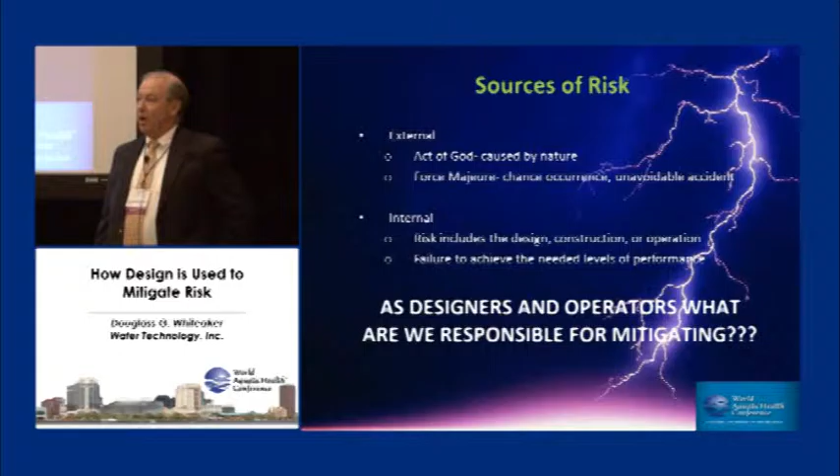So as designers and operators, what risks are we responsible for? Anybody out there want to chime in? Absolutely — at the end of the day, our clients and consumers want us to be responsible for all of those. Now, the ideal of risk management is to minimize spending, manpower, or other financial resources while minimizing the negative effects of risk.

This is done through a methodology of identifying, characterizing, and assessing the threats — looking at your facility and understanding where problems might occur — assessing the vulnerability of specific threats, and determining the risk: how likely is it to happen? Is it something that might happen in just a very odd set of circumstances, or might it happen more often than we'd like?

How many people keep track of incident occurrences and where they occur in your facility? That's a huge part of identifying where risks are going to occur, where they do occur, and how you can address them — and then listening to your clients, your users, especially what I like to call the active aging adult market, because those people are very vocal about issues. If they see tile sticking up that's cutting their feet, or slipperiness on a tile or deck, they're very happy to tell you about that.

And as a good operator, you want to make sure you go over there and take care of those things. So we're always identifying ways to reduce those risks and prioritize those risk reductions with a strategy. And that means if we see an incident report, and constantly we have a situation where we're having rescues on a set of stairs or in a lazy river, we've got to find out why and adjust that idea.

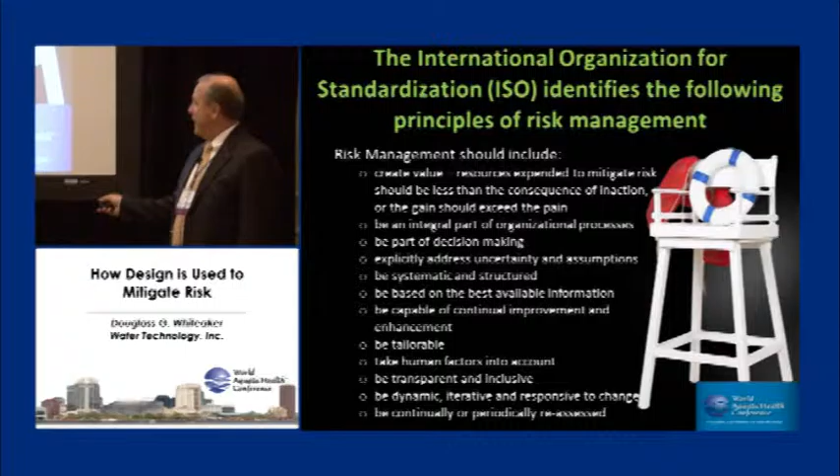And the risk management really has to be transparent, and it has to be inclusive of all the things that you're doing. And periodically, you really need to reassess what you're doing to make sure that you're covering all those risks.

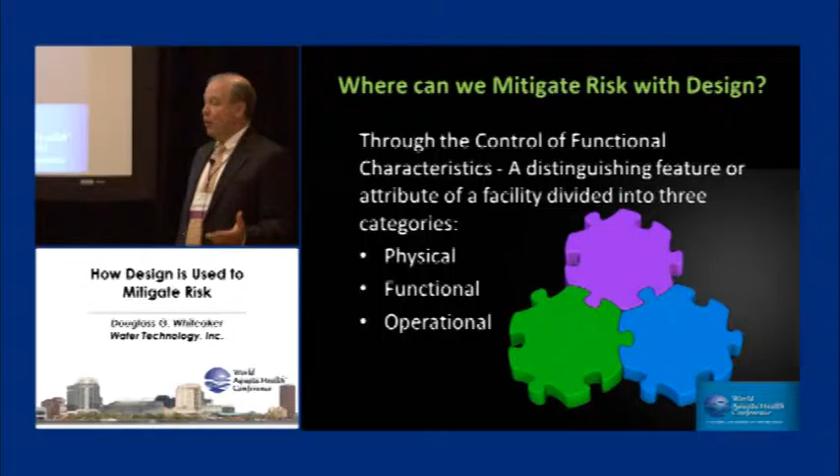And so, through the control of the functional characteristics, these are distinguished in three different categories: physical, functional, and operational. And quite frankly, at the beginning, we look at the physical characteristics, and hopefully we're mitigating the risk in the functional and operational status.

And so let's look at some of these functional characteristics. There's physical characteristics, there's surface properties, there's orientations, adjacencies, mechanical systems, and sanitations. And so this can be a really long, complex list of things to look at, and they must be.

When you start designing a new facility, you really want to look through each one of these things when it's going through the programmatic end. But when you're operating a facility, you want to be able to look at each one of these things and find out where risk occurs in each one of these categories.

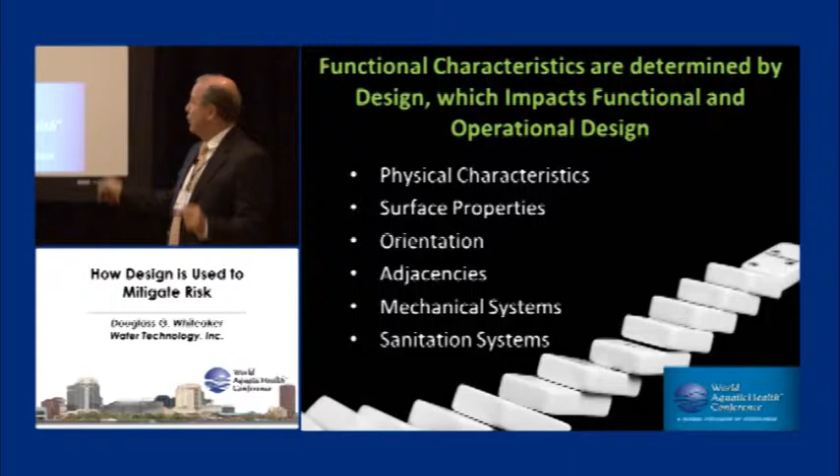And so physical characteristics, it's primary sensory. It's generally measurable because if you have physical characteristics, you have coefficients of friction, you have quantitative things you can talk about in terms of hardness, the smoothness, the shape, the color, the volume, the weights, and looking at turnover rates in terms of that nature.

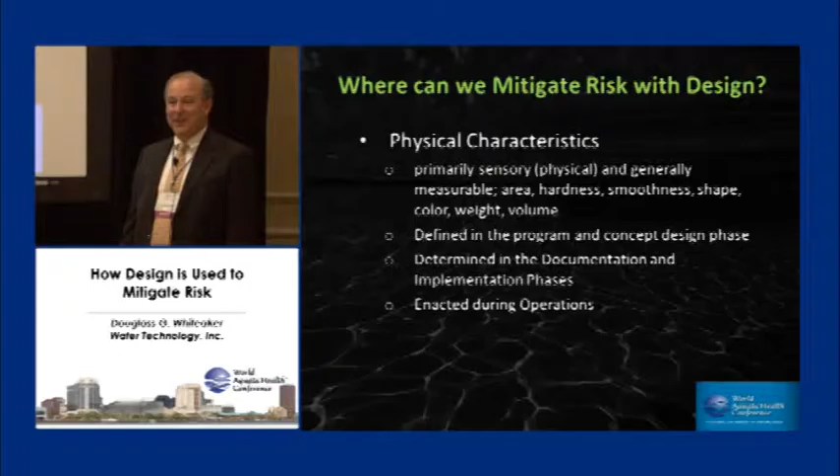You want to define. These are always defined in that programming and concept design phase. You want to, and they're finalized in that documentation and implementation phases when the facility's constructed, and then as an operator, we are faced with all those things when we're turned over the keys, and here it is for a fun and exciting place for our patrons to enjoy.

How about the transparency of the facility? Are we going to be able to see through that and look at where we're going to place guards? And we're always looking at that from a risk management perspective, where we're staffing lifeguards.

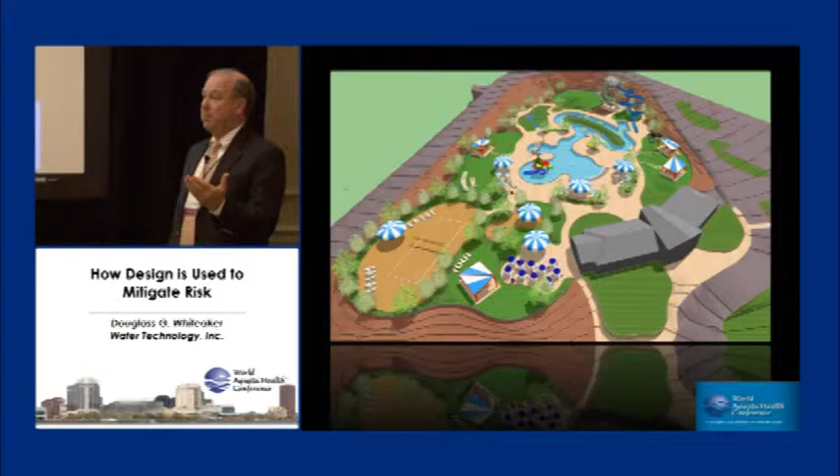And at the end of this presentation, we're going to go through some examples on plans where we can say, okay, here's a plan. Where are some of the challenges? So here's some images.

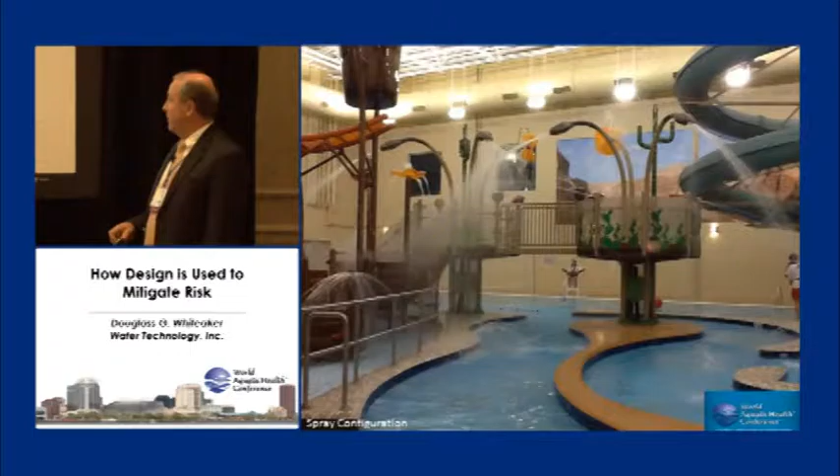This shows a play structure and some guards staffing it, and the sprays coming into the lazy river. One of the things we have to be cognizant of is where these sprays are overlapping and where they might cause blind spots in our water, because we're not going to stop having fun and sprays in our facilities. What we have to do is think about this from a staffing perspective so we can see where people might run into problems and not be seen when they are having problems.

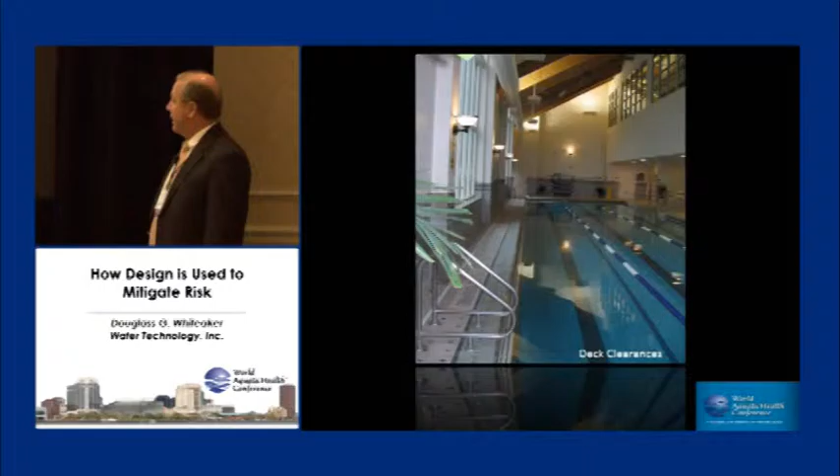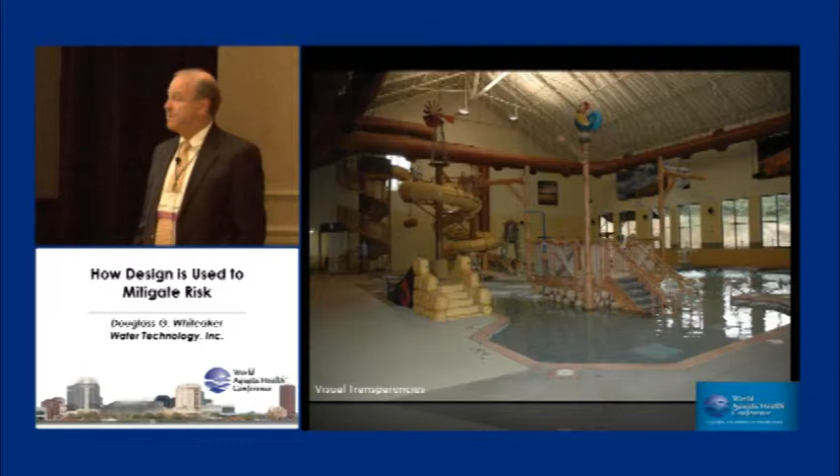Visual transparencies. You can see with this pool there's a lot of barriers. So if there are 2 people in the pool, you'd have to have 2 lifeguards, just because there's too much obstructed view corridor to be able to see where problems might occur.

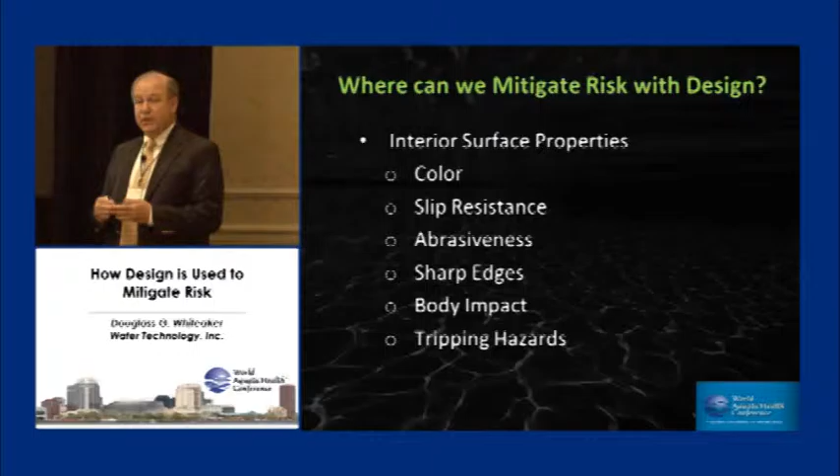Some of the interior surface properties are based on color, slip resistance, abrasiveness, sharp edges we try to avoid, body impact, and tripping hazards. This is a deck design, a ceramic tile deck. It actually does include a slip resistant tile. Typically, we see a 1x1 or 2x2 ceramic tile provide a good coefficient of friction.

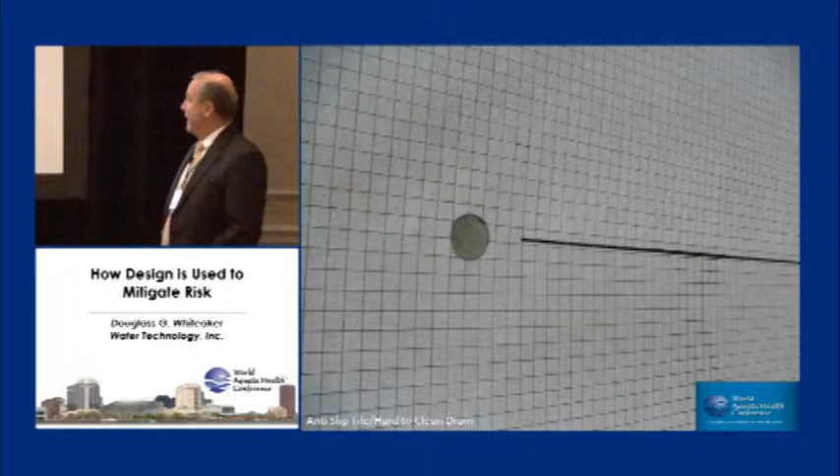But one challenge is that a lot of owners decide they really want nice-looking deck drains, these little slot drains that look really nice. But how do you clean that? Trying to clean out Band-Aids and hairballs and everything else that goes down there is very difficult. So looking at that early in design, and going for functionality rather than aesthetics, is really important.

This shows a non-slip deck with broom-finished concrete, and a deck drain that does have the capability of being cleaned. You can lift that up and clean it out, much easier to operate.

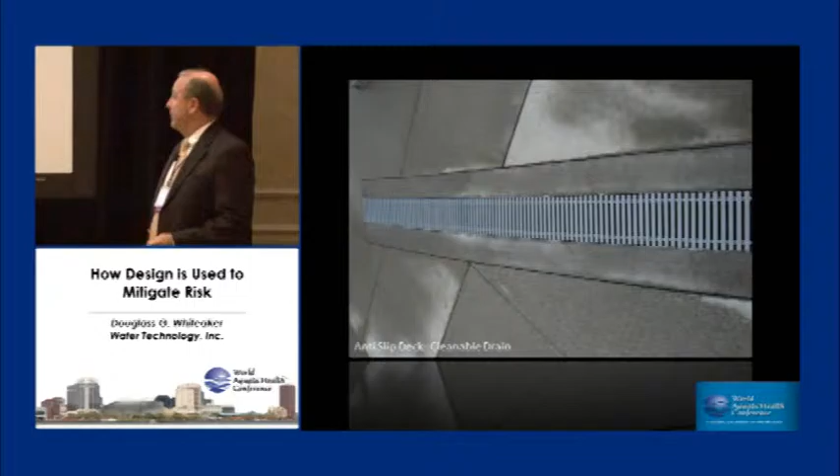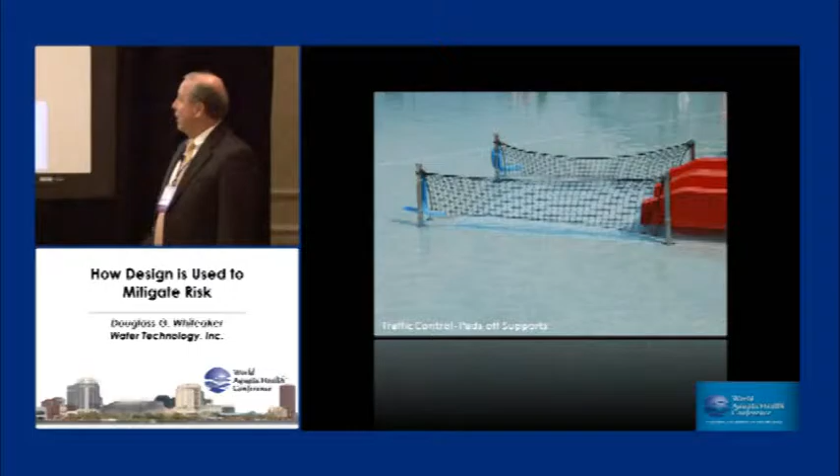Again, having good traffic control, having safety landing zones with soft pads from these slides. One thing we see here, from a maintenance or even design perspective, is that some of the bumpers initially installed on that are now fraying. From a walk around the facility, we want to make sure all those things are maintained.

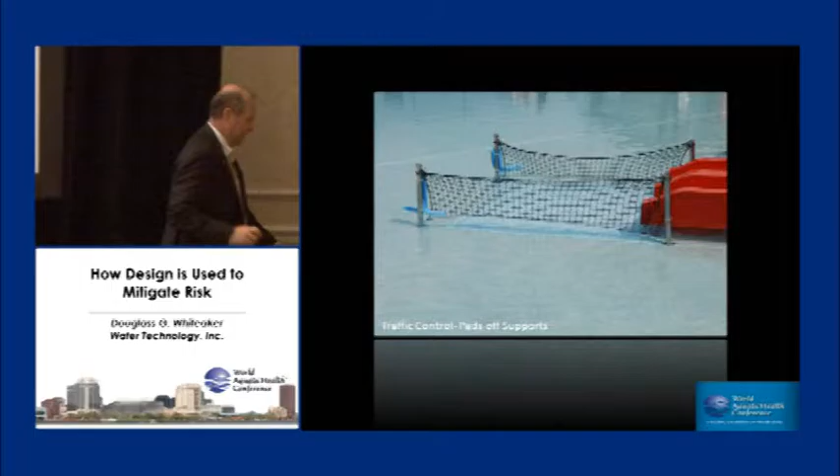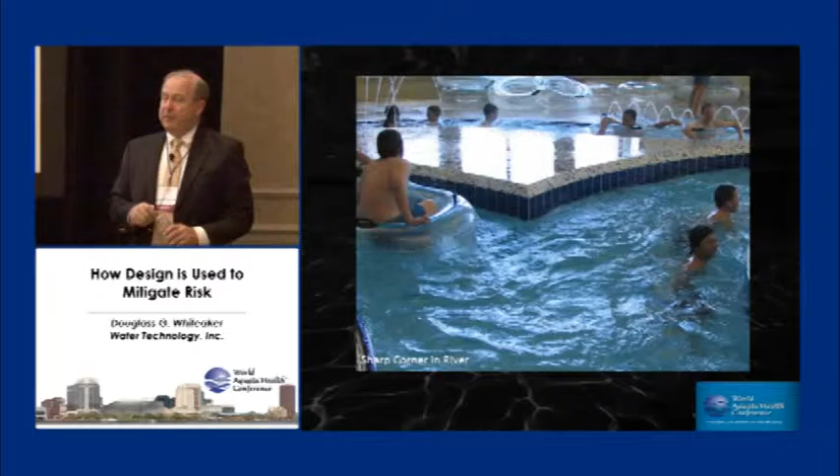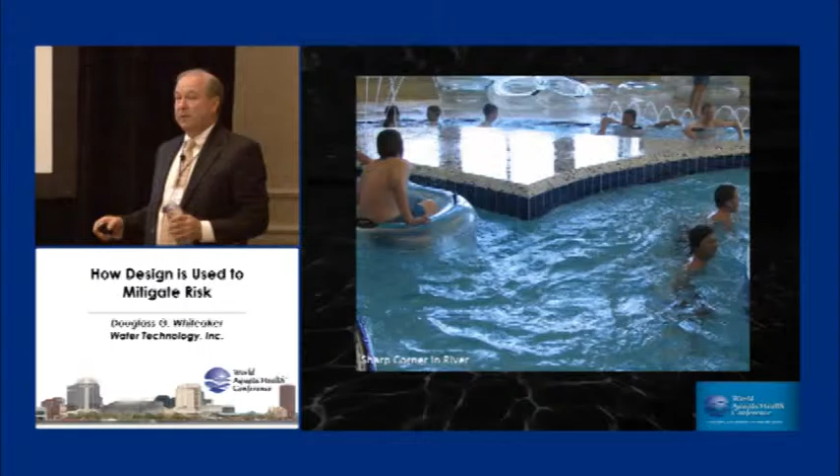Here's an interesting issue on the lazy river. The current is flowing this way and this way, and we have a sharp point right there. These are things we want to look at in the design or operations, so that people floating around underneath the water, propelled by the current, don't run their heads into that sharp corner.

Again, this particular facility is actually in... is anybody from the peninsula, or Puget Sound Peninsula? I mean, this is the Seattle area.

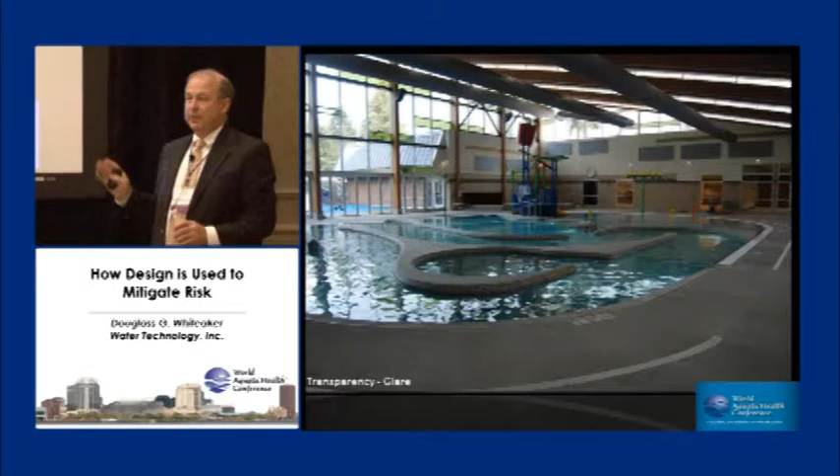They don't have too many sunny days up there, but this picture was taken on a sunny day, and you can see, even though we have great transparency in this facility with all the glazing and fenestration, there's glare. So it'd be difficult to guard this in some areas. You'd have to have more guards in there.

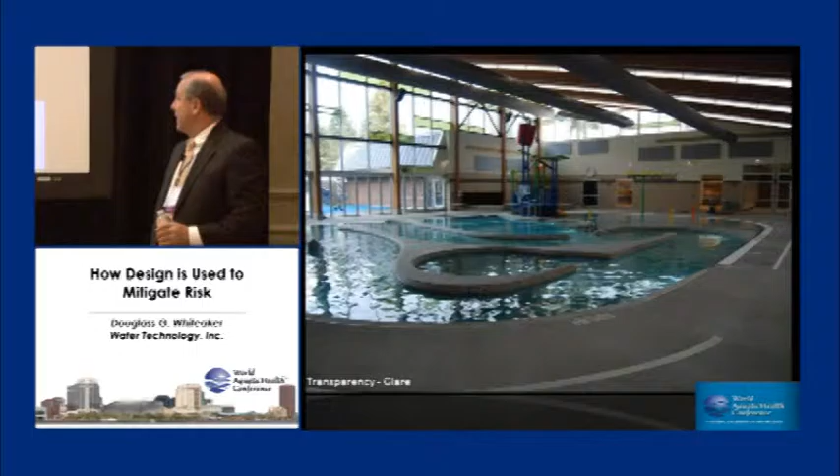But this does illustrate a nice deck drain that's a non-slip deck, easy to maintain, and provides a nice functional deck. This is one of the run-out slides popular in family aquatic centers.

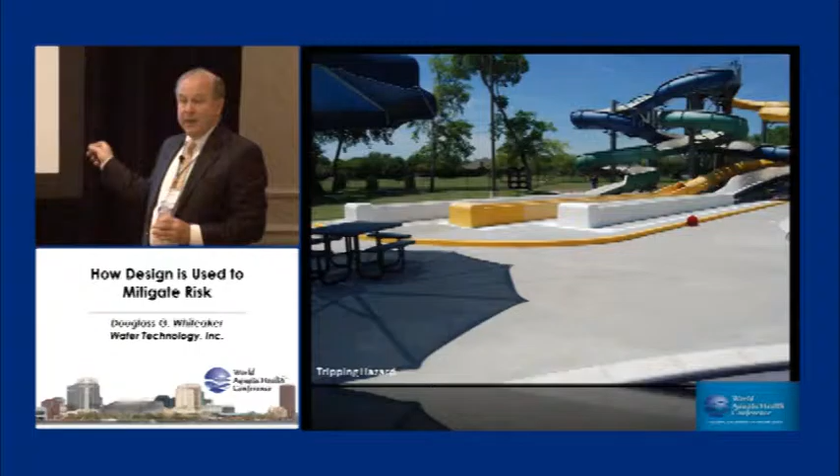There's a mechanical challenge to getting these slides to be on the same level as the pool deck. This is one solution, but I don't particularly think it's a good design solution to raise that up and have a step coming out of the slide. As patrons come off the slide they're excited and might not see that, or if they're coming over to see their friends, they might not see it and trip on it. So it's a challenge.

Here's a design where the water sprays were placed along the deck side, and so these enterprising young men decided they would make a water feature in the deck. Placing these things on common walls, where they can sit on them and spray all over the deck, creates a water hazard that could be a slip issue, and also wastes a lot of water.

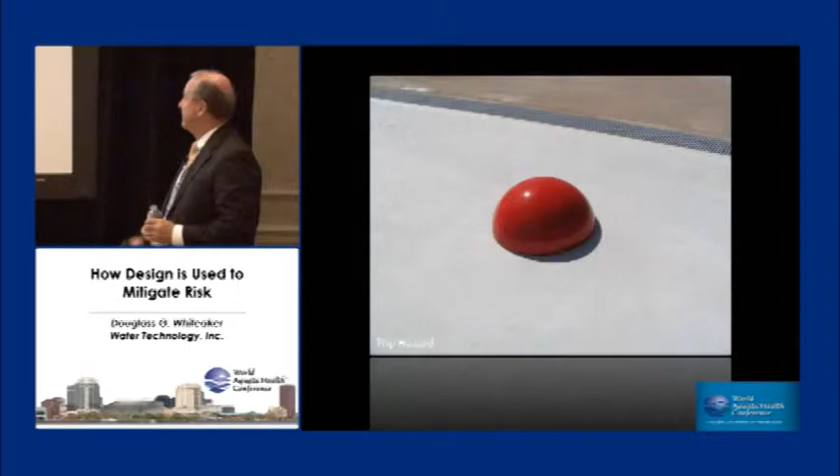Again, I see pools that put these big things, sometimes not so big items, in the floor of the pool. Even though it's a brightly colored object, kids sometimes aren't paying attention, and they could be tripping over these types of things. Now here's a good example of...

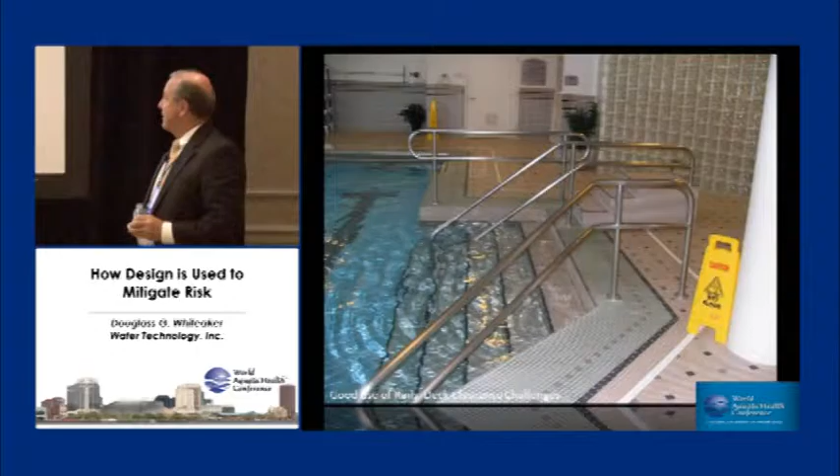This is from the past, where it's a pretty good use of the rails for easy entry of users of all different heights and abilities. But the problem is, look at the closeness of this rail to the column there. It's too close. So from an accessible type of a feature, it becomes a challenge.

Again, this shows a very challenging way to try to enter onto that transfer tier, unless you're over here, which doesn't meet the ADA requirements for distance.

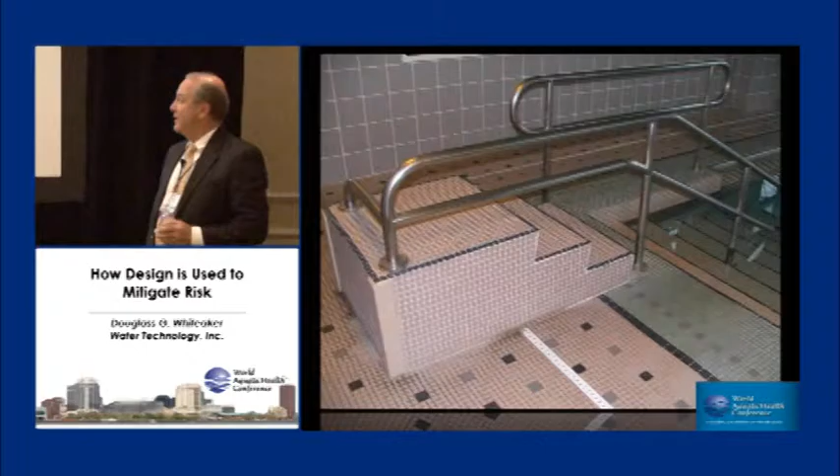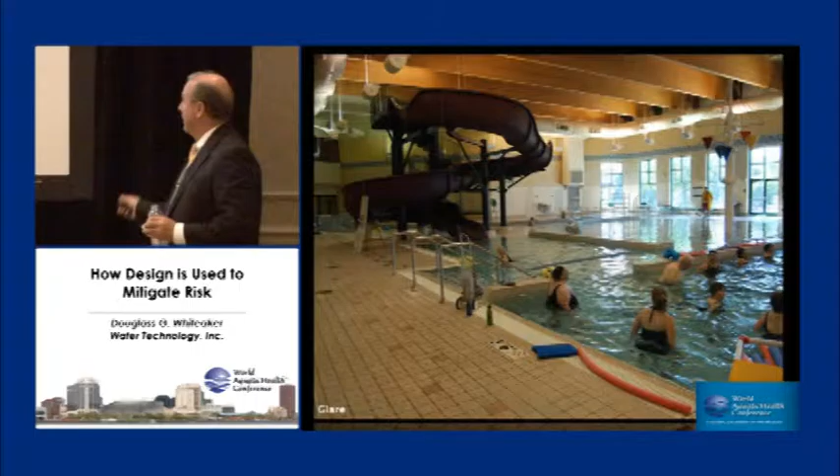This is a good example of a facility that has relatively good transparency from this perspective, but the glare on the water becomes very difficult for a lifeguard to be able to see what's going on in other places. Orientation, whether it's a solar orientation, the lighting levels within the facility, or the water depth placement, those are all important aspects to optimize that transparency.

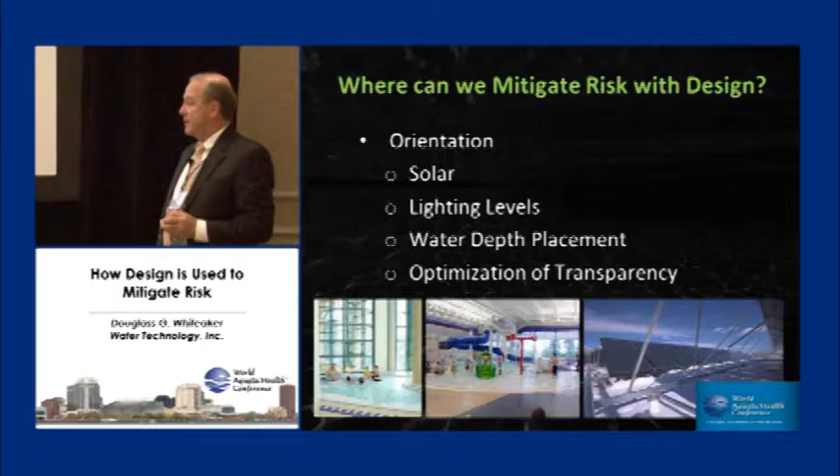This is a facility I visited a couple weeks ago. This is during the day. During the day, that facility had 5-foot candles of lighting on the deck. And at nighttime it's even worse.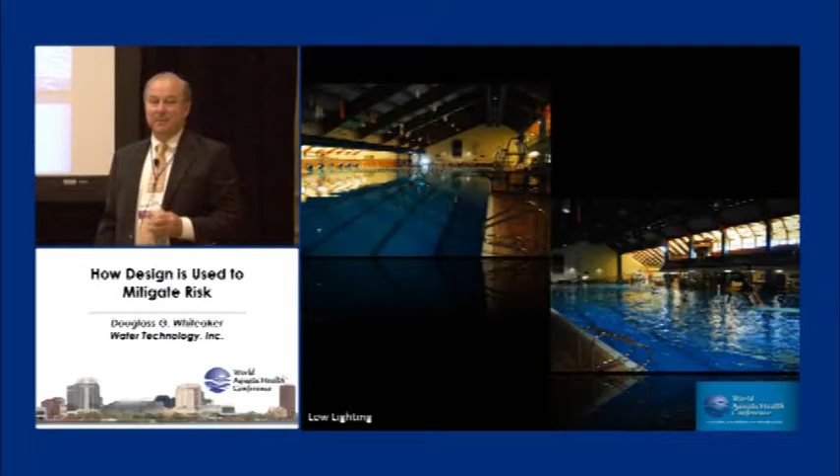The reason for that is because in the original design, they put these lights way up on the ceiling, surrounded by ductwork. There was no way to get to them. They hadn't changed the lights in 20 years, which was really interesting. They were talking about having mountaineering guys come in and rappel to change the lights. I said, well, what you need to do is change light positions so you can actually change lights.

One way that we're seeing that helps balance the light is actually to provide clerestories or clear walls, so you can bring natural light in all over the facility so you don't have glare. It's a diffuse light. This is a good example of how that can occur and have natural light that doesn't create glare.

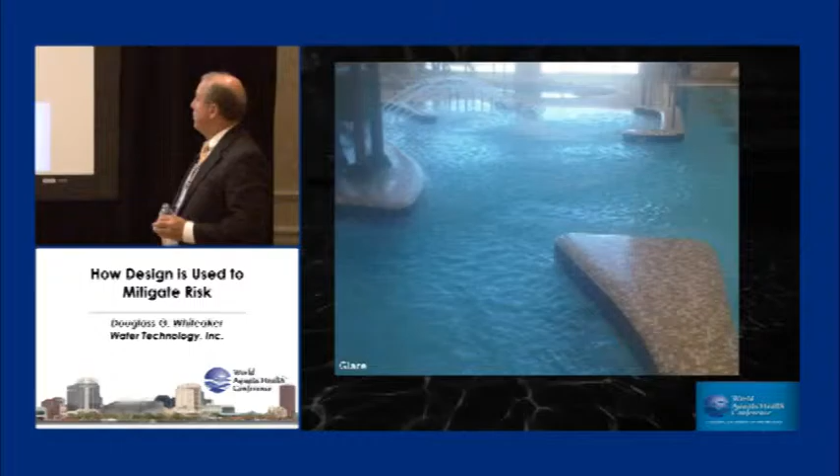Again, glare across the pool is very important. Here's a good image of a nice pool, a wave pool. Obviously, there's nobody in it this particular day, it was raining, but it does show having lots of play facilities. There's great transparency, even though it's a wave pool. It can be guarded with minimal staff, but when this pool's busy, you don't have to worry about people not being able to see all around the pool.

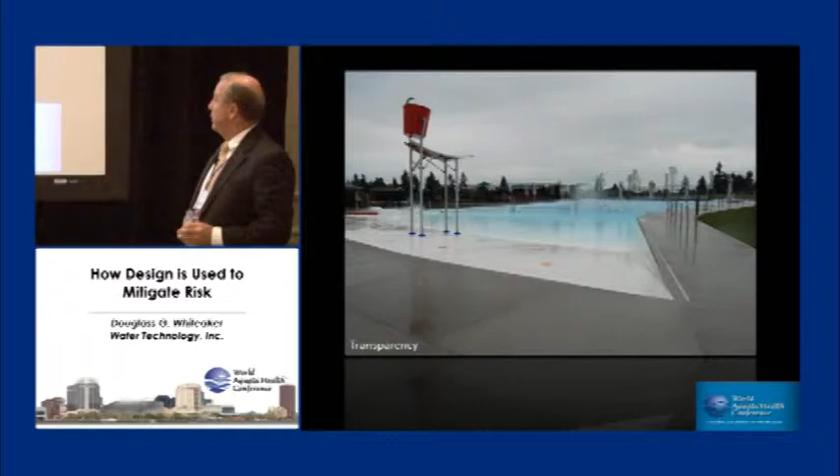Here's a particular pool that we're seeing a lot more of, the splash pads. The splash pads oftentimes are one of those anomalies - do we need to guard a pool that's only 6 inches of water depth? Well, I think we do, and it's really important. One of the things all of us in the aquatic design industry are doing is challenging the manufacturers to make it more transparent, because if there were 2 kids in this pool, you'd need 2 guards to be able to see it. And when you start to get 150 kids in this splash pad, you need to have even more.

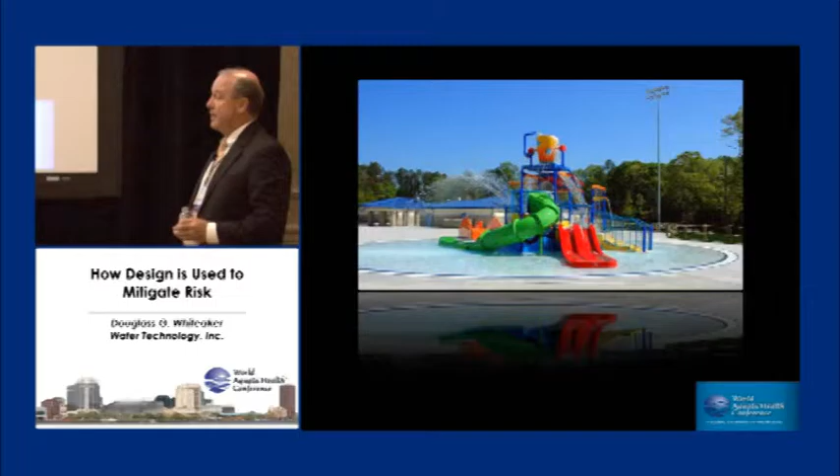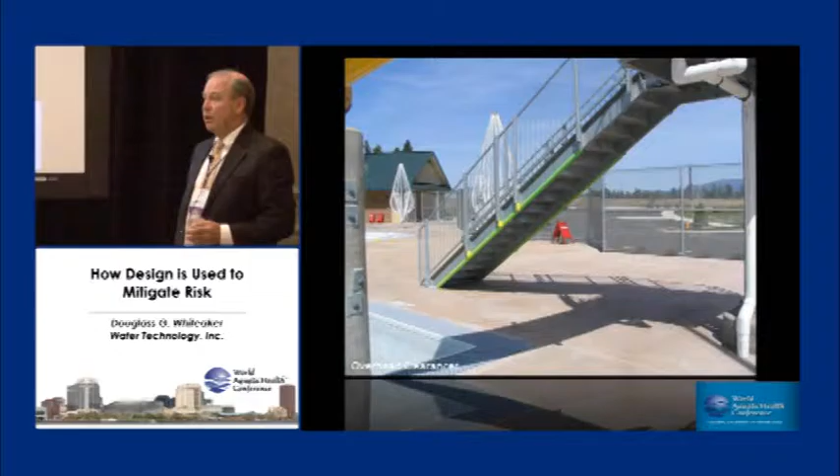Overhead clearances, how these are designed—there should be a fence around this so people can't bump their head. You can see the operators have been kind of creative, taking noodles, slicing them in half, and putting them on the stair rail. But again, that doesn't prevent somebody from banging their head into it. So it's really important to look for that in the design of these facilities.

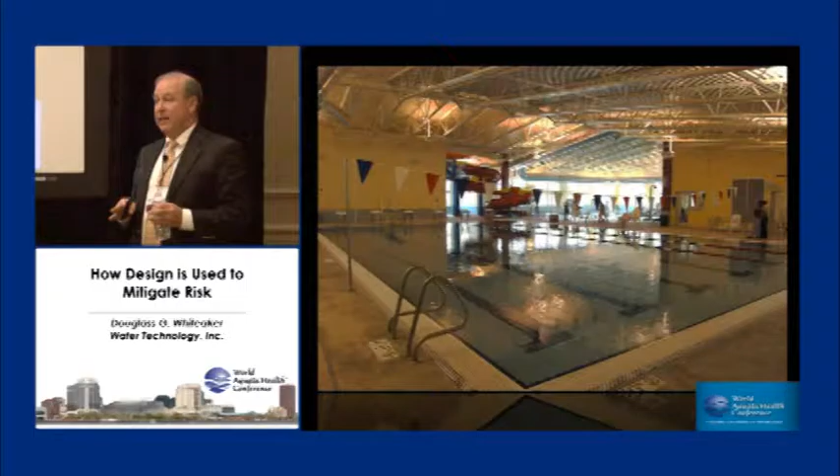This is a good example of what happens when you don't have sufficient interior light and you have a lot of exterior light. You get dim light levels over here, and then it creates that glare. So it's important, if you're going to use natural light in a facility, to bring it in as diffuse light and bring it in as deep into the facility as possible so you have even light levels around there.

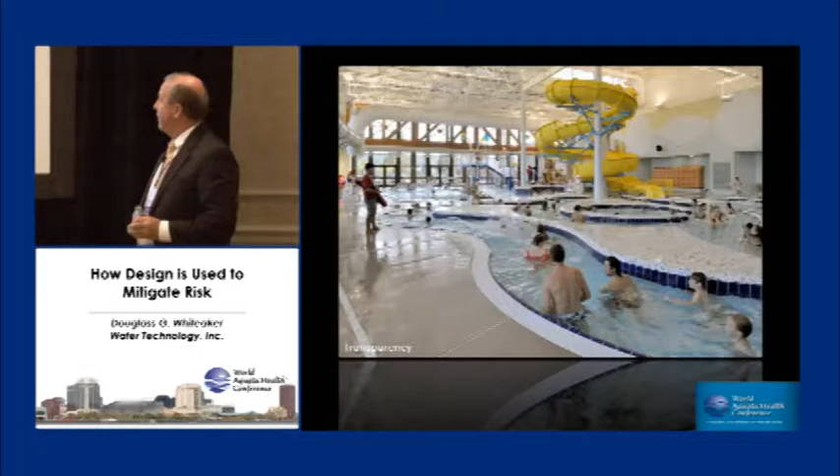This is an example of a facility. This particular one has those deck sprays, which really should be over here so they're not causing possible water loss. But this illustrates a pretty good transparency, so you can see through there. That's by design, and that's one of the things we're seeing. Even the play structure—you can see underneath it—so you have that great transparency. The adjacencies are another good place where we mitigate risk.

Where are different components, like lazy rivers? Where's the shallow end? Where's the entrance to the locker rooms placed? Where are the lifeguards' positions? And where are the amenities? So that we can design a facility that has good entertainment value, or watertainment, but also is easy to guard and maintains its programmability. This one shows some of the challenges here.

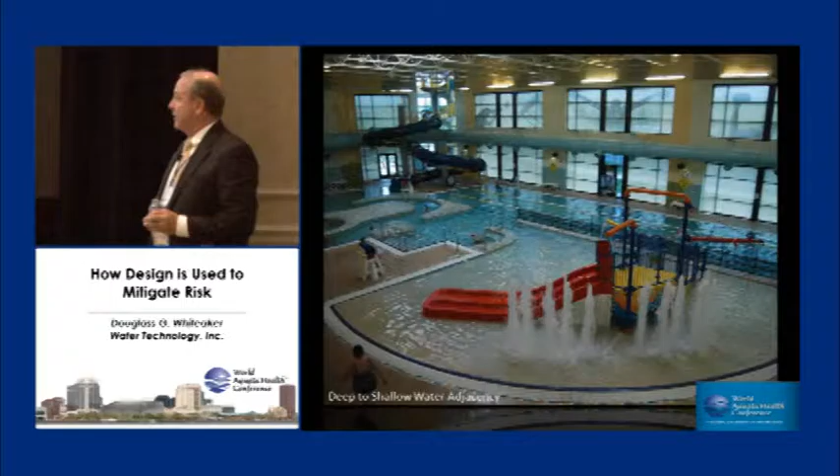It does have good transparency, except for right here in this play structure. But one of the challenges here is that they had a guardrail here, but this is 10 feet deep water, and this is zero depth entry. So guess what? That adjacency of shallow water to really deep water created a lot of risk and hazards by people coming, little kids getting into that area and causing risk to happen.

This shows a very transparent facility. Again, this is zero depth water right next to a lazy river. So instead of putting a screen there, they positioned a guard to make sure that this challenge of having moving water right next to this zero depth water didn't create an issue.

The other thing this pool does have, over in this room, is their competitive pool. So they actually separated their competition pool from their leisure water. And they have a common entrance over on this side, so you can either go to the competition pool or go to the leisure pool, which works out very nicely—so you can have swimming meets while you're still maintaining your leisure and warm water activities.

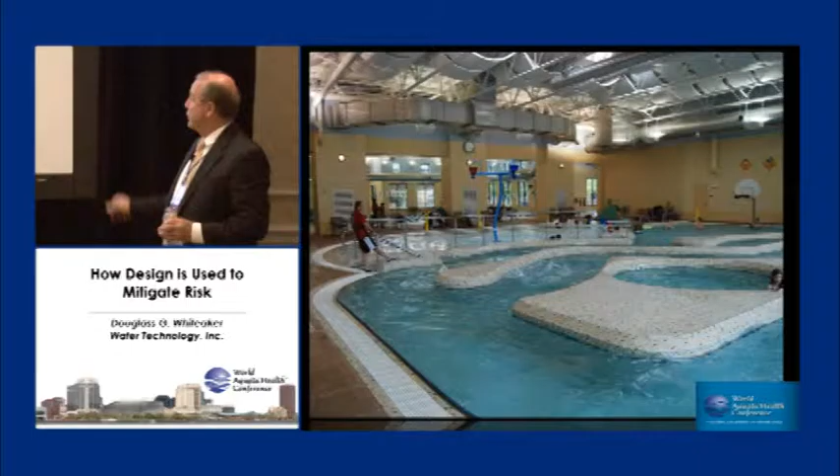This is another common occurrence that we see, where people come in—this is a 1-by-1 tile. It was well maintained in the fact that the night staff came in and every night buffed that tile, and they did a really good job of keeping it clean. But what they did is made it really slippery. So it's important to use the proper cleaning chemicals so you don't shine the tile and you keep its coefficient of friction.

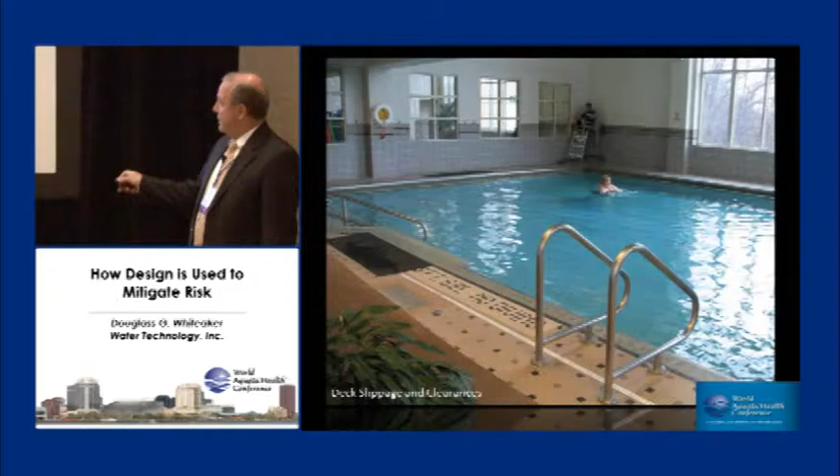And this is what people have had to do—put different types of mats down so people don't slip. And again, you can see this is a wall here. There's a nice plant, and this distance between the ladder and the wall is very close.

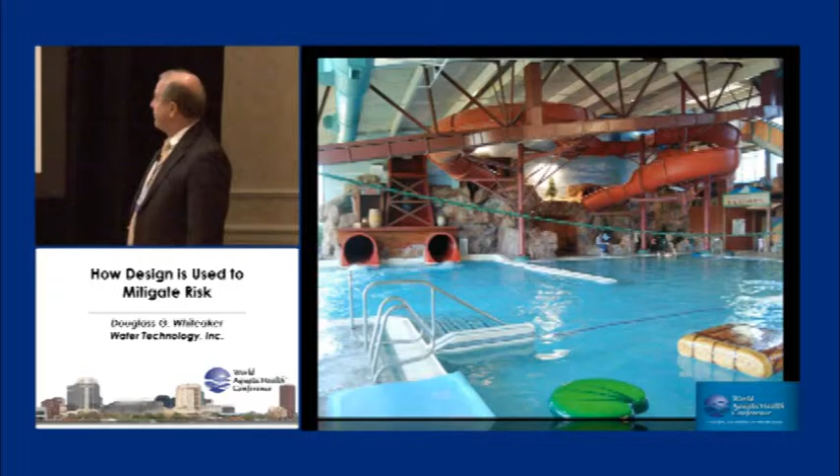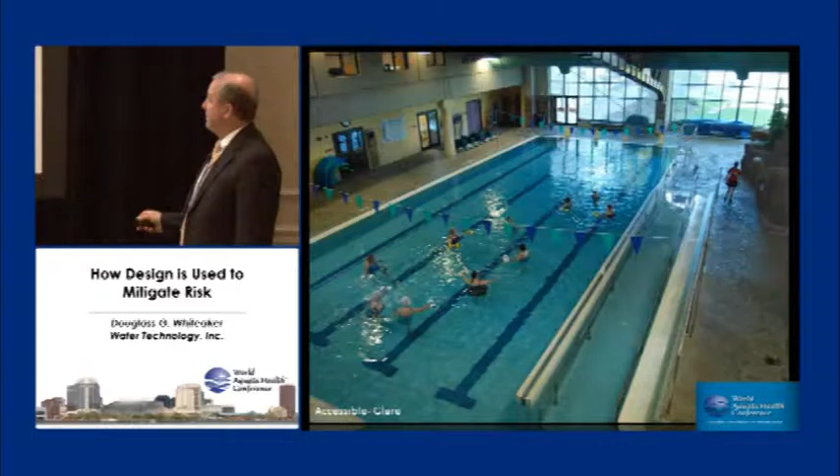This is a facility that has a really nice ramp that offers accessibility to the pool. It's very heavily used by a lot of different programs, including lap swimming. But again, look at the glare that's occurring because of the exterior windows.

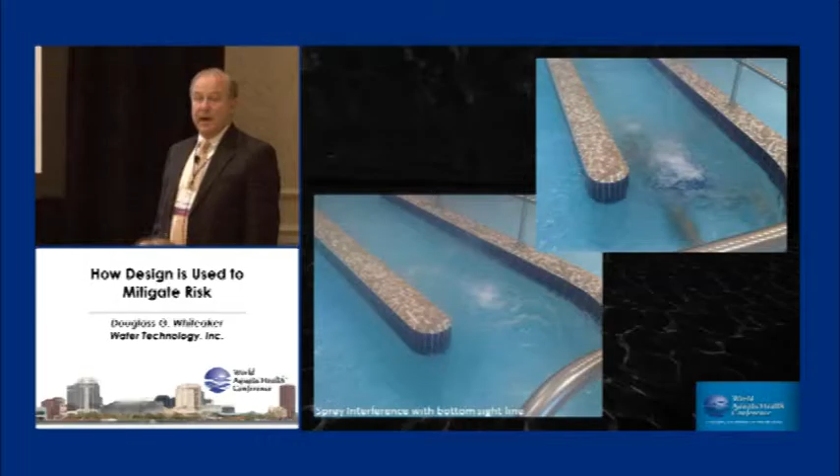This is a great example of spray interference. This was prior to putting in a rescue profile. Now you can see that rescue profile, and you have to really look for that to see it underneath the water there, and that's only 18 inches of water. Here it is in a lazy river where you can't see that rescue profile underneath the water. So it's really important—we were taking a picture of that—to consider how sprays are going to combine so that you can make sure you can see through those on the design.

Mechanical systems are another place where, through design, we always look at turnover rates. Sometimes our state health codes are just minimums. We have to remember that the guidelines are the minimums. If we're going to do a pool that's going to be more heavily loaded, have a lot more people come to it, we've got to exceed those and have faster turnover rates, because some of these health codes were authored in the 70s when we didn't have leisure pools and spray pads like we're doing nowadays. So in design, we've got to look at that.

We've got to look at turnover rates, the type of filtration, how we're collecting and distributing the different water, and then make sure it's easy to operate, because a lot of times it's tough to get great help these days to maintain them. So we want to make sure we're designing for the level of our staff. Otherwise, if we get it too complicated, there's not too many mechanical engineers operating these swimming pools.

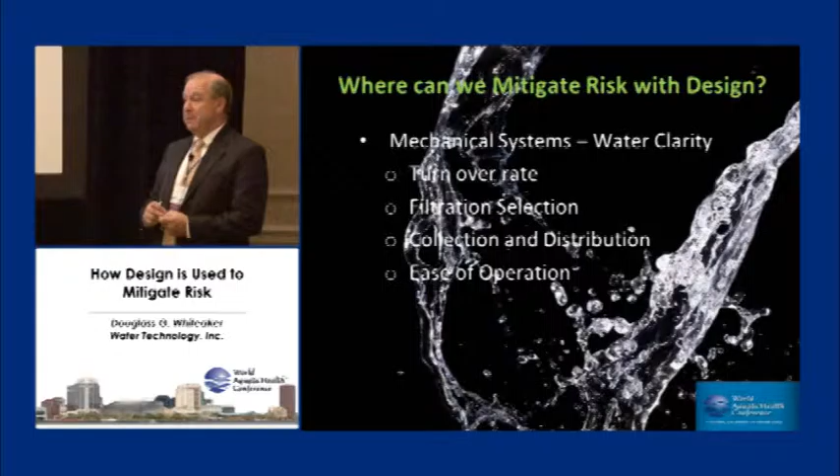Some of the trends we're seeing in the industry to help provide crystal clear water that's easy to maintain and cost effective is using regenerative media filters. Regenerative media filters operate to a lower micron size. We're seeing the popularity of medium pressure UV systems going in on every body of water, especially in these indoor leisure pools, and also on the booster pumps that atomize the water to take the chloramines and byproducts of disinfection out of those facilities.

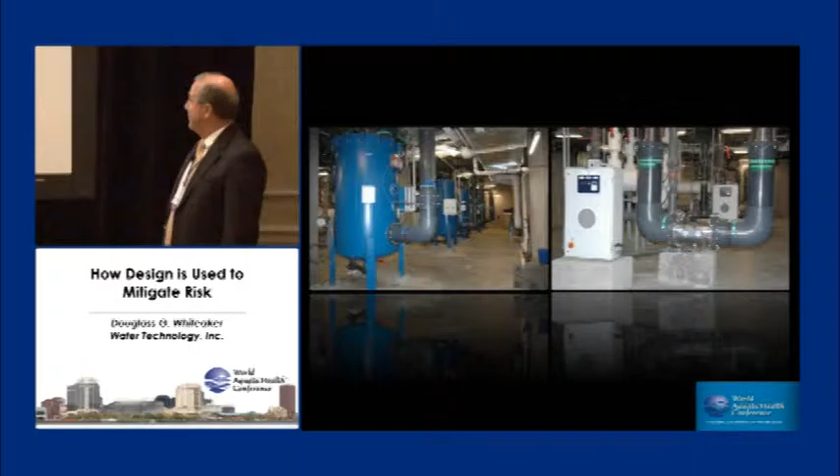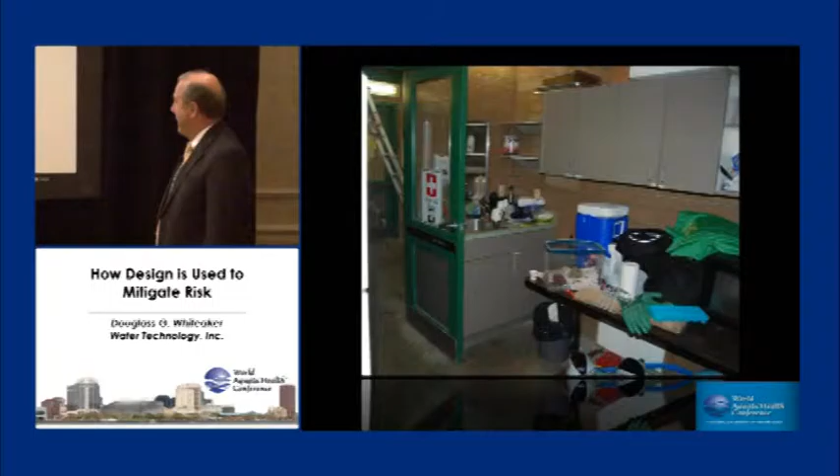This is some examples of what not to do. This is the lifeguard safety room. You can imagine what would happen if there was a rescue that had to take place in this particular facility. I don't know how you'd get to the cot.

Again, this is a different facility. This is the pool manager's office. I don't know how they would operate. If I was a consumer and I walked into this facility, I would turn and walk out the door if I saw this, because what kind of level of competency does this tell you is happening here?

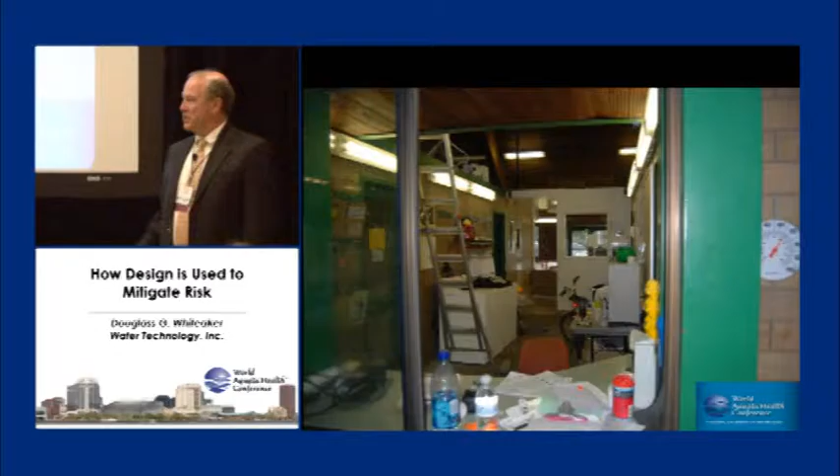And this is the look from the entrance through the facility. This was even a funnier thing - they had an HVAC unit on top, and open guard rooms, and they're constantly sending up guards to flip the switch on the HVAC unit, and they had open locker rooms right next to it. I don't know if I'd want to change in that room.

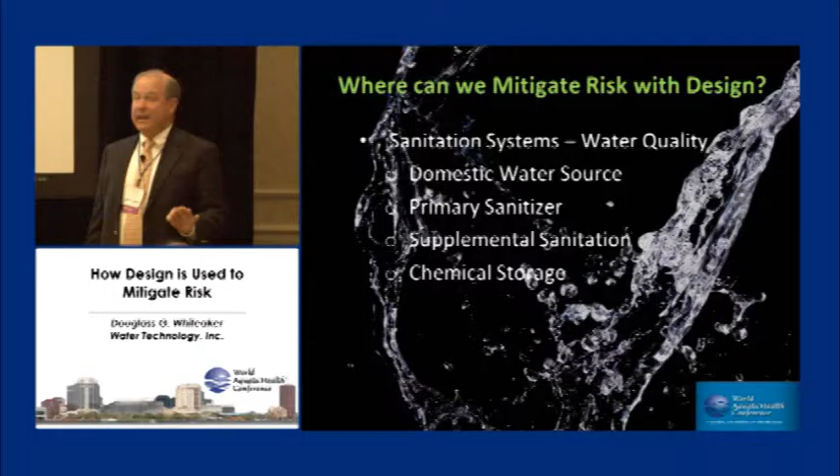So you see a lot, but through design we want to take care of a lot of these issues. Here's some of the things we see in chemical storage rooms - things that have been stored there for such a long time, they don't even know what it is anymore. Broken bags, just a complete biohazard waiting to happen.

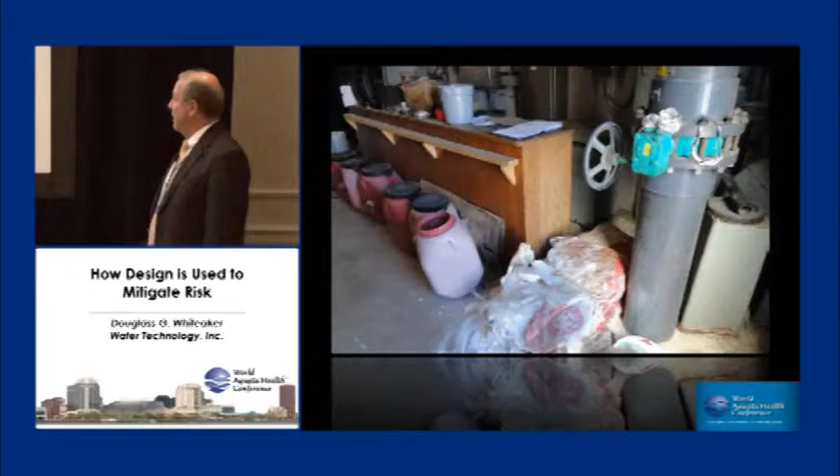Here's chemicals that have been stored in a facility - we've got acid, chlorine, hydrogen peroxide. A whole bunch of different things in the same chemical storage room that wasn't ventilated. Again, this is a potpourri of things that shouldn't be all in the same place at the same time. So it's really important to look at all these designs.

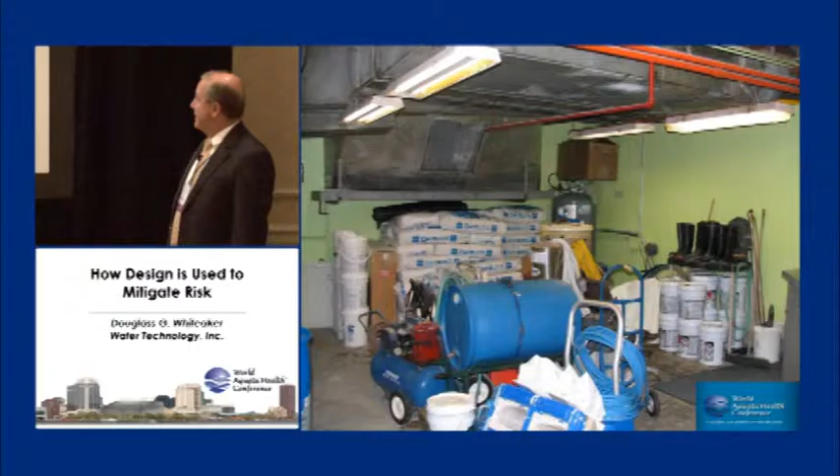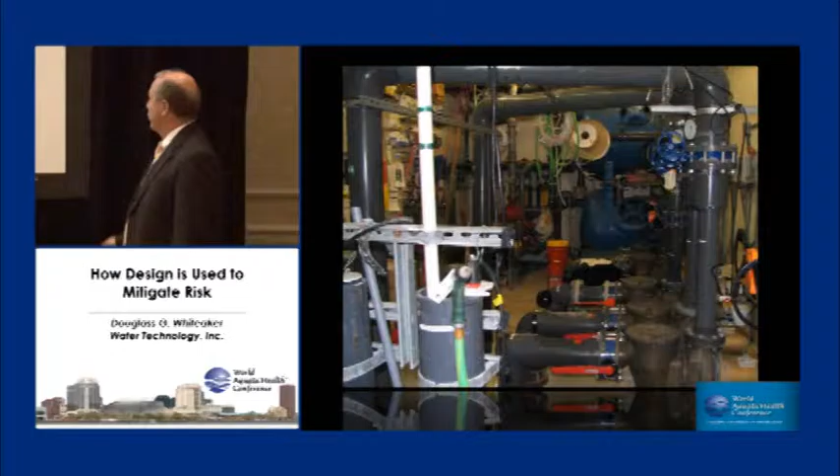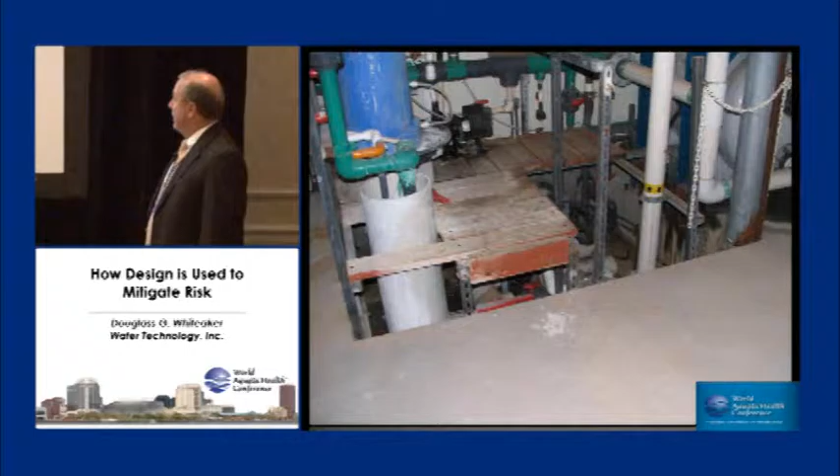Mechanical rooms, by design, shouldn't be mechanical closets. We should have accessibility to be able to change out pump motors, move valves, and get through here - not become storage rooms for other things. You should not have to be a contortionist to change a pump motor, or even to look at the pump strainer basket to see if it needs to be changed. If you design a situation where you don't provide good access, today's operator is not going to look at it until there's an issue.

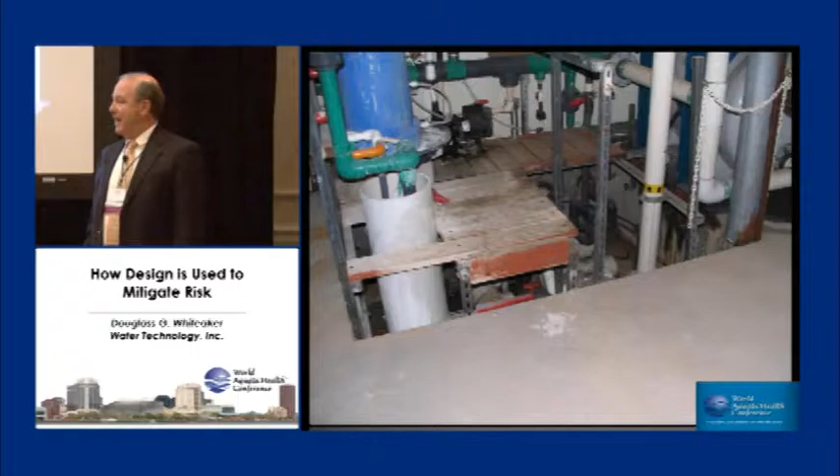Again, another potpourri of things happening here. You can't get to any of the pumps. We've got chlorine being stored right next to everything. That's just an accident waiting to happen. So we want to make sure that every time we look at these facilities, we're designing in enough space to properly store, maintain, and operate all the mechanical systems.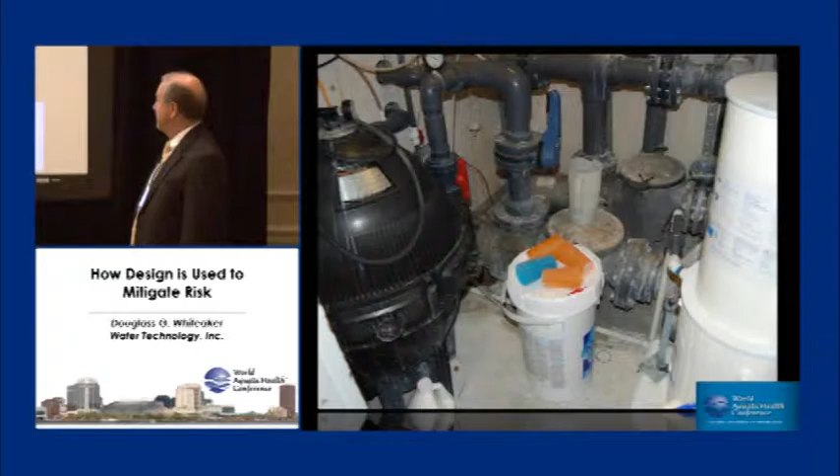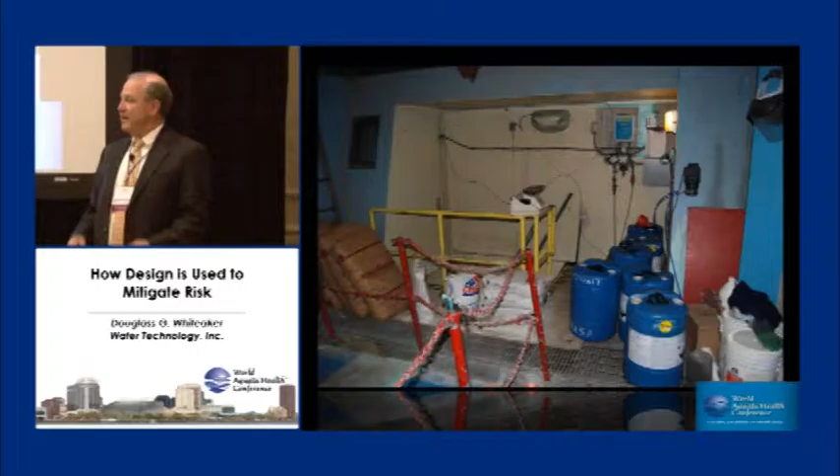Here we have a great situation where we're storing dry chlorine, acid, and liquid chlorine all in the same spot. We have chemical pumps with their lines, no conduits around them. What happens if the liquid chlorine and the acid decide to start leaking at the same time? That would be a very nice response. And again, this was even open to the pool area.

Again, here's a mechanical room that had a little bit more room, but through design, it wasn't really thought out where the valves need to be in the surge tank. So they just kind of put them wherever they wanted to be. And so now it becomes difficult to access all the filtration systems.

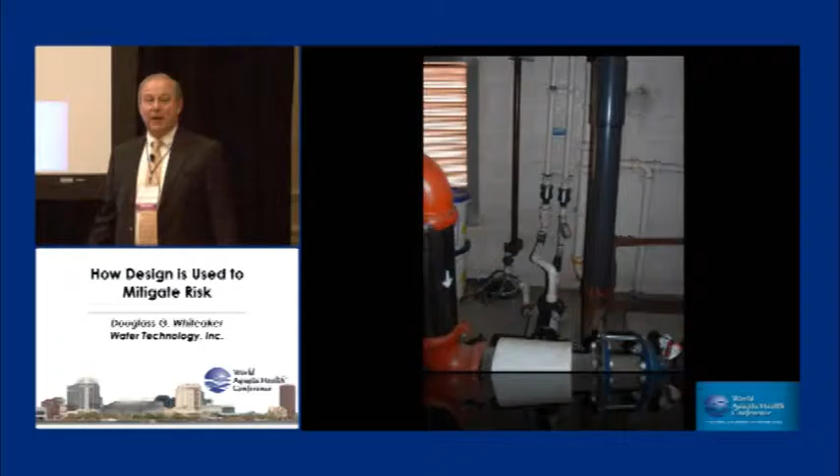This is one of my things I always look for is indirect connections. This is actually a filter that's backwashing at a high rate with a direct connection to their sanitary sewer. The only thing that saves them is that it goes into a much larger sanitary system. If this was tied into a smaller sanitary system, whenever they backwash their filters, they'd be flooding basements throughout the neighborhood.

Again, I don't know if I'd want to adjust this chemical controller with all the wires and things that are open, a junction box that hasn't been maintained. So these are the types of things as an operator we need to look at from a design standpoint, how we control this, and every single day we should do an audit. We should have a checklist of different things that we need to pay attention to so our facility doesn't get to this level, and that creates a challenge.

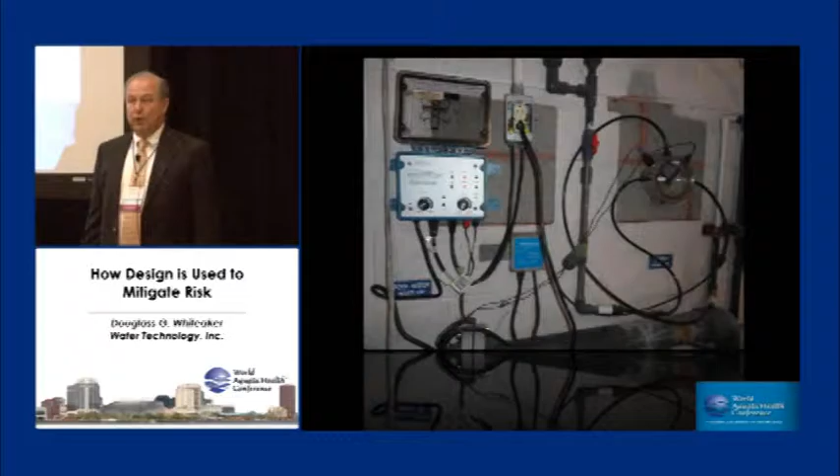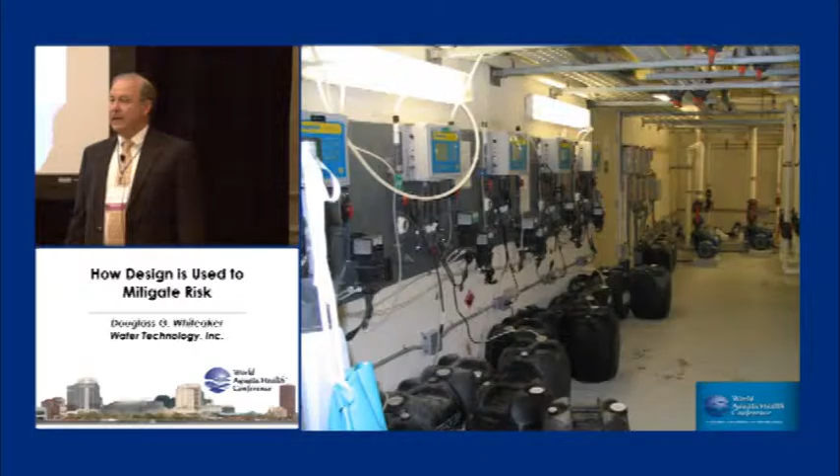Again, here's a much better laid out mechanical room, except now we have acid and chlorine right next to each other, in the same space with all the other mechanical equipment, with no chemical storage rooms that are separately stored and ventilated. And again, these poly tubes don't have any conduits around them, so anytime a little leak occurs, you can walk into a nice acid bath if you'd like.

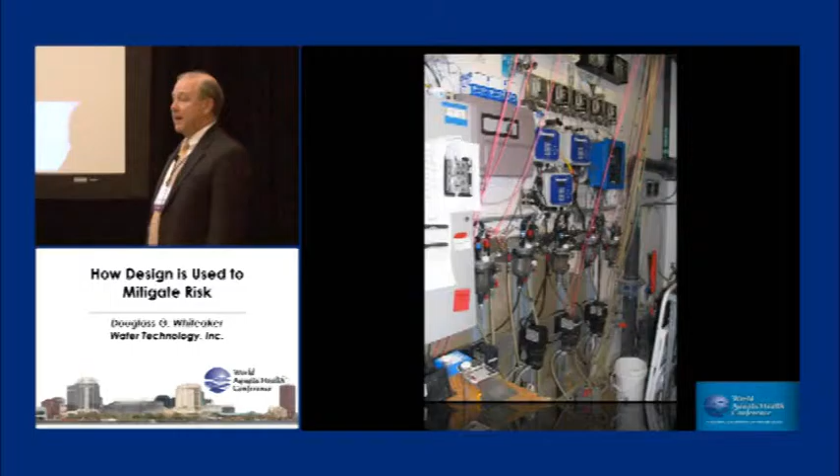Again, this is some of the things we see in these mechanical rooms that have become mechanical closets, where they start stacking things on top of each other, and so the operator's not going to maintain it. So these are things we have to look at.

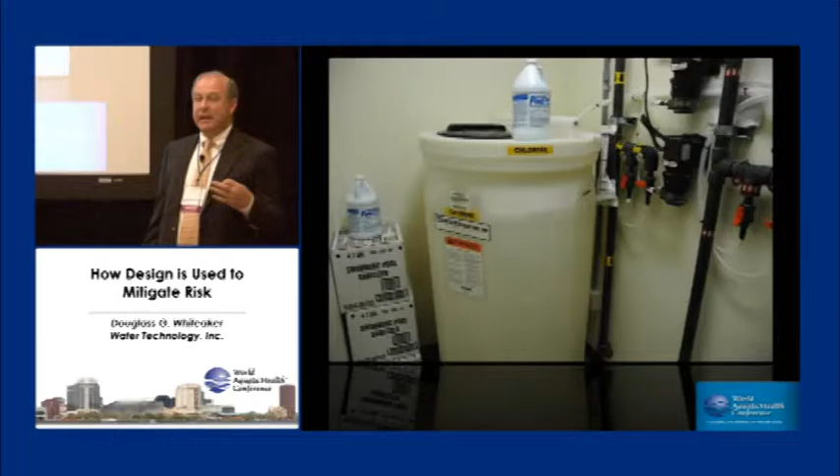This picture kind of illustrated putting metering pumps inside the chemical storage rooms. Well, even though the chemical storage rooms are ventilated, they're still exposing these chemical storage pumps. The manufacturers love to put these in here, but these should actually be outside of it, so that they're in an area that's easier to maintain.

Again, chemical storage pumps right over the chemical storage vats. These actually have a sacrificial bung that has a small line in it so that it's not off-gassing into the room, but there's no vent. So they were wondering how come they can't get stuff out of their tanks, even though their tanks are full.

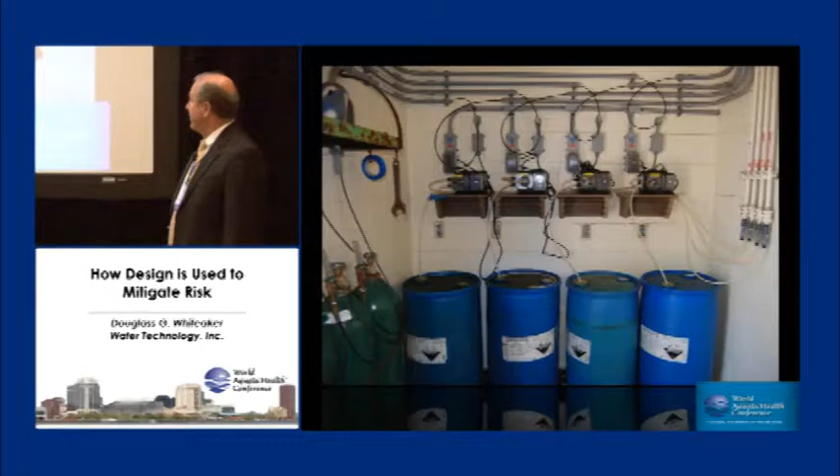This is an example of a relatively well laid out room. There's plenty of room to get around all the pieces of equipment. Nothing's in their way, and so it does provide accessibility and ease of maintenance.

Again, some of these rooms get pretty complicated, but again, this particular room, even though there's a plethora of piping and all the things that are happening here, everything is easily accessible, and you can walk through it without the fear of snagging your clothes or having a disaster happen.

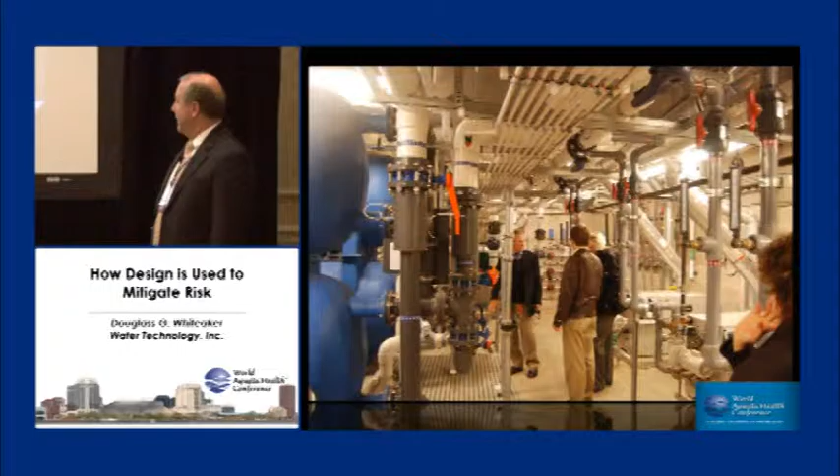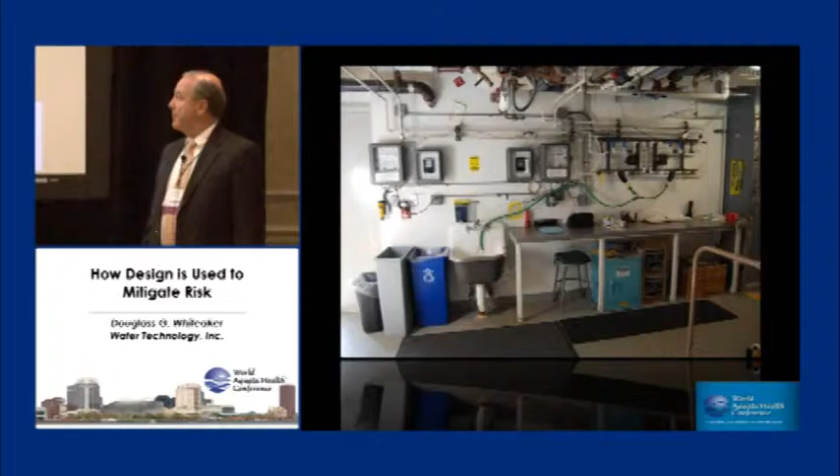This is an example of a well thought out testing area. All their pool controllers are here. They have a sink, they have a storage area for all their records, and it's nothing fancy, but it's one of the things that makes a pool operation much easier and well thought out, and everything's in its place.

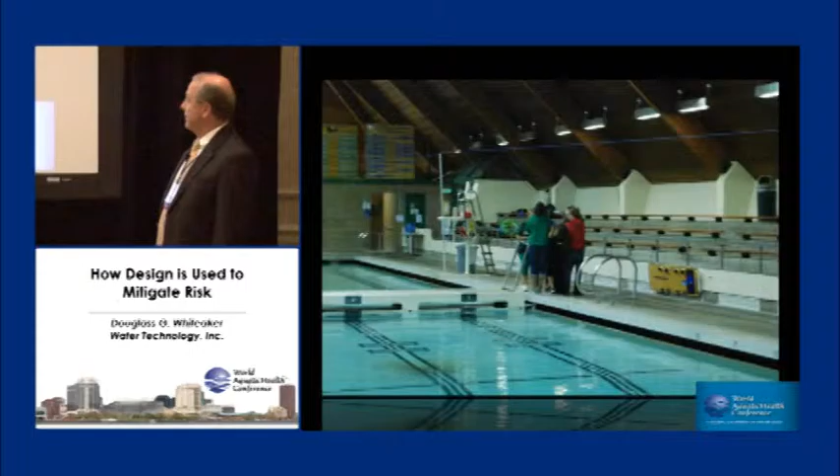One of the things we look at on competitive pools: how many people should it take to move a bulkhead? We have a girls' swim team, half of them are over here, and half of them are on the other side trying to move that. Well, that's something we have to think about in design, so we can easily move those bulkheads and not make it a challenge or worse yet, an injury for the athletes that are coming to practice in this facility.

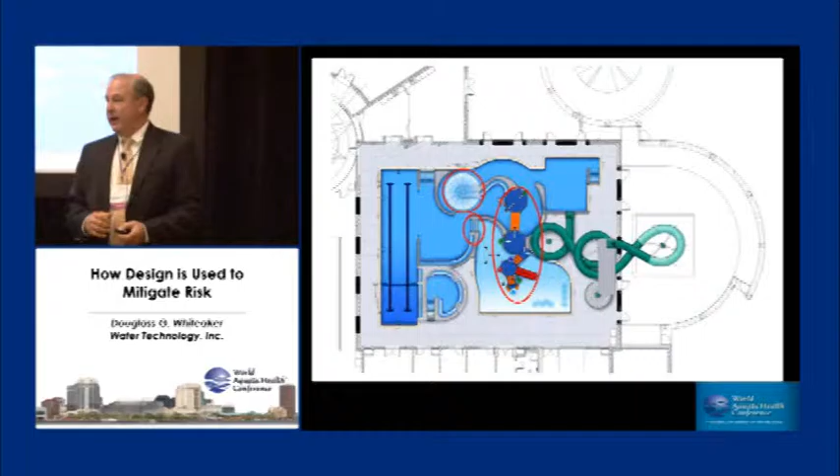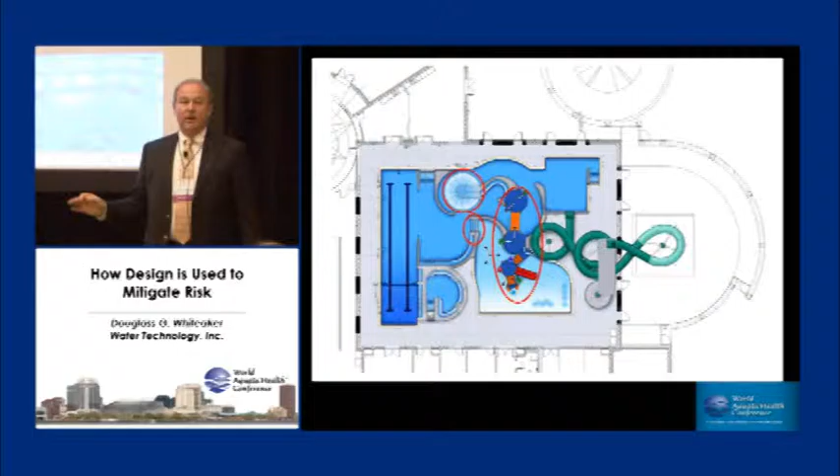Bringing that whole team together in a collective effort to achieve success for a facility, that's what's going to happen. So I want to thank you very much for coming. It was a pleasure to be in front of you guys today, and a lot of great ideas coming out through here. Enjoy the rest of this conference, because this is truly, as you all know, one of the unique conferences in the world where people come together, share ideas in a very professional manner, and even new ideas to help make all of our lives and our clients' lives easier. So thank you very much.